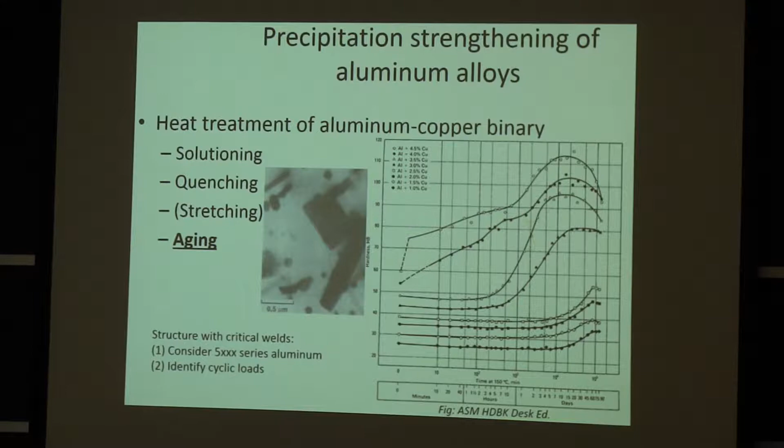Aluminum alloys, if you remember from yesterday, their strength increases when you heat them up, when you age them after the quenching. So if we go through the time-temperature treatment, you expose them to high temperature, that's temperature and time, and that is to put the elements in solution. At that point, say it's an FCC structure for aluminum, all the copper, all the magnesium, everything is in solution. There's only a single phase, no precipitates.

Then very rapidly you quench it. And that's where Professor Eagar mentioned about forming residual stresses, because if you have a thick plate and you cool the outside, yes it will shrink, but the core will prevent the whole thickness. If this is thick, the core of it remains hot, and therefore you can have a little bit of stretching of the skin, essentially.

It's the same way that you do tempered glass. You cool it down rapidly, and you deform plastically. You exceed the yield strength on the surface on each side, and when everything cools down, you're left with compression, tension, compression. It could be good or it could be bad, it depends on your application. So in the end product, once you're quenched, you have these residual stresses.

Now, you could use the alloy as is in this quench condition, but it's normally very soft because when you quench, you didn't have the time to form the precipitates. What do the precipitates do? They increase your yield strength. They are obstacles to dislocations in aluminum.

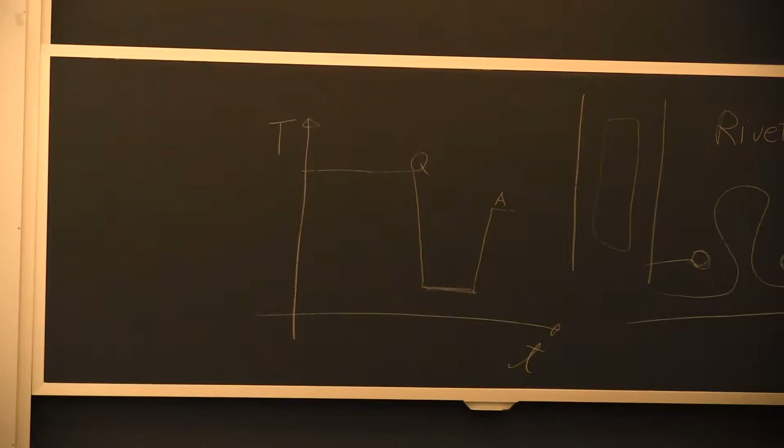The relevance of it with respect to this class this semester, as Professor Eagar mentioned about welding. In welding, you'll heat up the material in the heat affected zone, and that's essentially what will change this whole treatment. Professor Eagar mentioned 6061 as being a very typical fabrication alloy. It's being welded a lot of time in T6, which is the high strength temper. It's close to the peak hardness.

If you have this material and you weld it, you fuse in some area, and there's another region next to the fusion, the heat affected zone, that gets heated up and cools down really fast. So you will lose your precipitate in that zone. I'm showing this right here to illustrate what Professor Eagar mentioned about a factor of 2 reduction in strength. So that is here, this pinkish curve.

But for yield strength, it's even more. So depending on what you're designing for, and if you're looking at fatigue, that's the reason why in terms of aluminum alloys, you have to take an additional factor of safety if you're going to weld aluminum. It's not becoming brittle, it's just becoming really, really soft in the heat affected zone. And therefore, if you have cyclic deformation, fatigue, you'll have a chance to form cracks at a lower load.

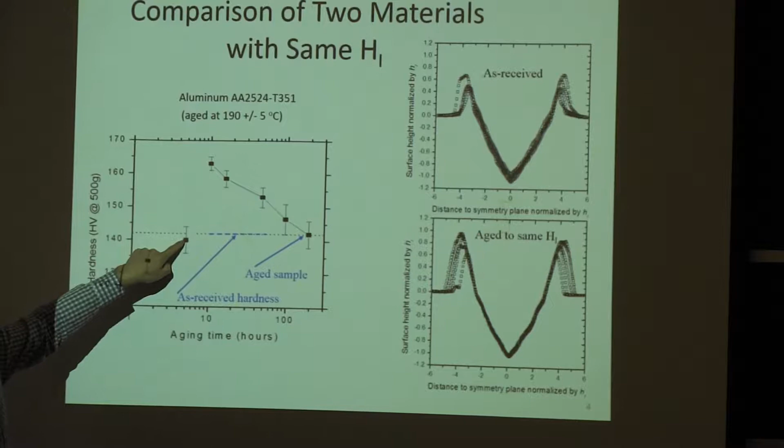The other aspect I was bringing up, this data here, is just to show that same thing in terms of hardness over time. It's going up, then it's going back down. It's an experiment I did back when I was a graduate student where I compared the underage configuration, so smaller precipitate, to the larger precipitate here.

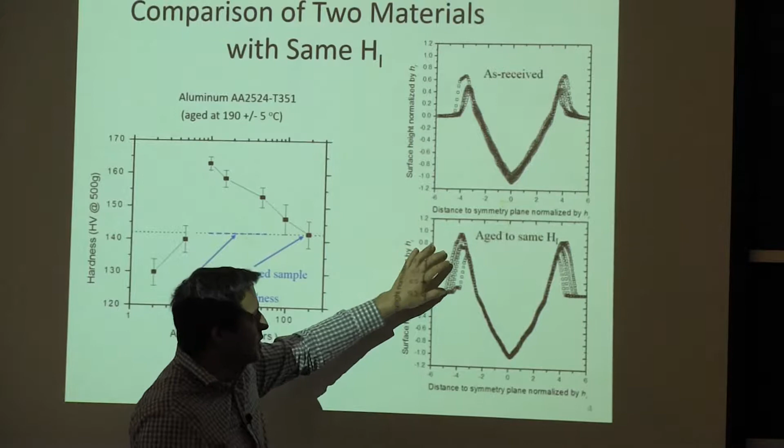In a scratch experiment, you're looking at a conical indenter that's going in this direction out of the plane of the sheet. Same loading condition, but you can see that you're forming more pileup, more material is building up on each side of the scratch in this configuration when it was overaged. So again, this is bigger precipitate. The material doesn't consolidate as much because the dislocations start going right through the precipitates as opposed to forming these loops.

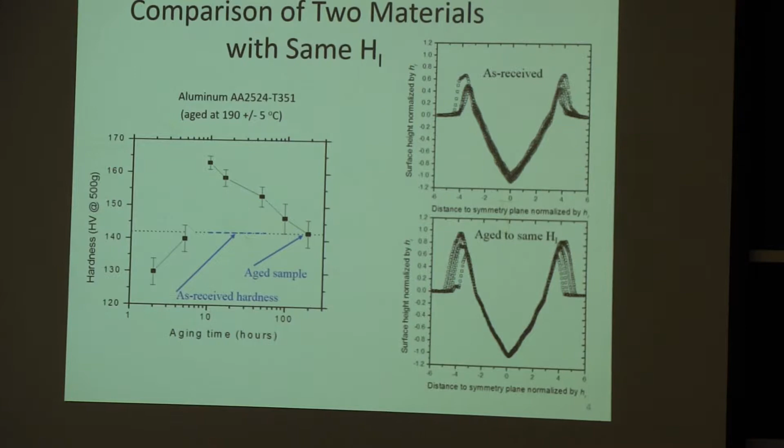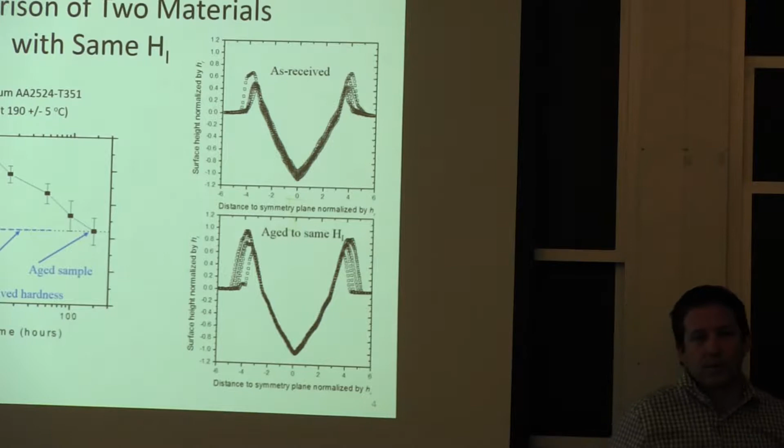And essentially multiplying the dislocation. So if you have multiplication of dislocation, everything hardens, you distribute more of the strain, and the material doesn't extrude as much to the surface. Part of this experiment was really to show you can gain more information if you're doing a scratch test as opposed to a hardness test, because when I went to the lab and ran the hardness test, I got the same number, but when I ran this test, I saw a bigger difference between them.

So it's a test that's very sensitive to hardening of the material, which relates to whether the precipitates are slightly smaller than the maximum hardness or slightly bigger. We will still use overaged aluminum alloy, especially in the 7000 series, not because of the mechanical performance, but because they have better corrosion resistance. So that always comes into the whole decision-making process, where yeah, you want great properties, but also you need to resist pitting if you have chlorides in the environment. And that's what bigger precipitate allows you to do better than if you have a very, very fine distribution of precipitates in the alloy.

So that's what I wanted to do for aluminum. Any questions? Because we're really sort of moving out of the aluminum section now.

That could be very general. Professor Eagar is here too.

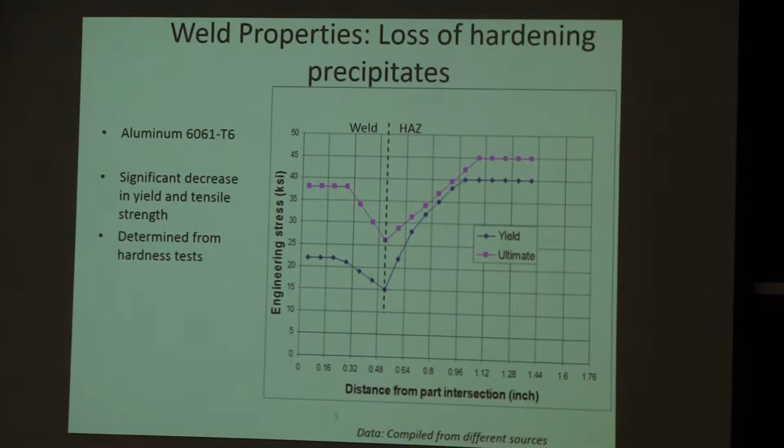Aluminum alloys are very useful, and they're generally good for corrosion resistance. Although if you fall outside pH of 3 to 9, you lose the natural protective oxide. So if it's in concrete, for example, you can expect more issues. If it's in a very acidic environment, in industrial applications, you just cannot use it. But for atmospheric conditions, like building applications or cars, it's normally a great material to use, pending that you are willing to deal with the reduction in strength during welding.

So last time in my third lecture on the use of materials, I talked about quality control, and one aspect that came in was workmanship. When we had the solder joint, I passed it around and essentially said whether you get good coverage, a good penetration of the solder in the socket really depends on if you're going to do a good sanding job and apply the flux and heat it properly. It's experience, but it's also true that every single time there's some variation in how you manage to do this soldering process. And it's the same in welding.

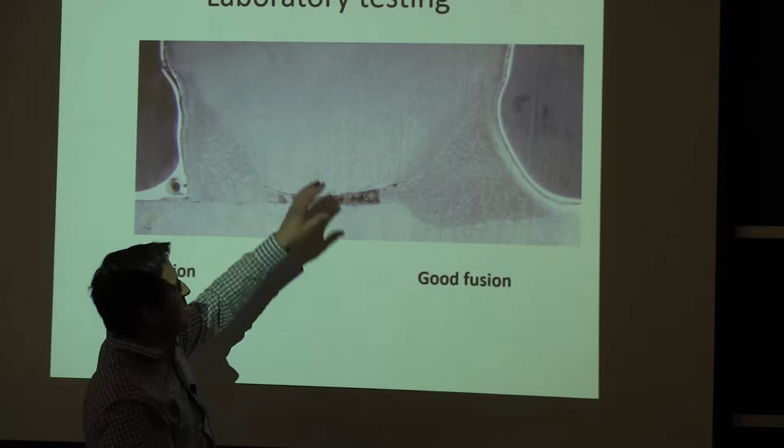If you remember, we talked about these roof joists. The roof joists were a tin piece. Here this was a tube, a thin wall tube for the chord, and we had these bars as diagonals that were a lot thicker. What I was pointing out is it's not a weld that's easy to do, because you have to enter a corner, as opposed to being at a right angle just doing a fillet weld. We call it a flare bevel - that's the name of the detail. This was an example that didn't work so well, because they put all the heat to melt the bar, which is the hardest component to melt, but there's really no significant fusion on the tube.

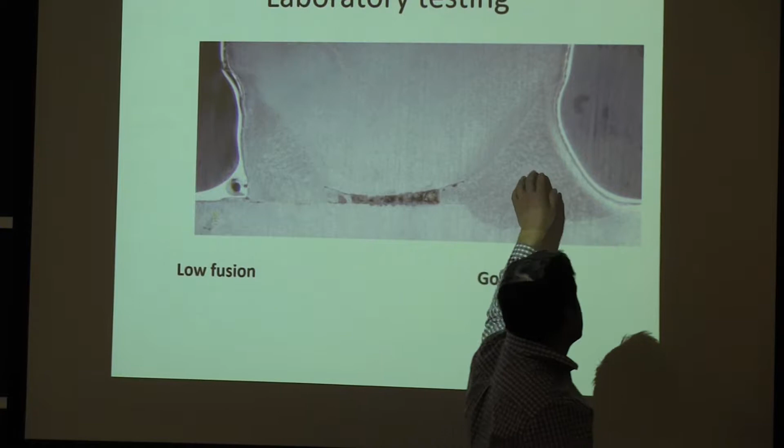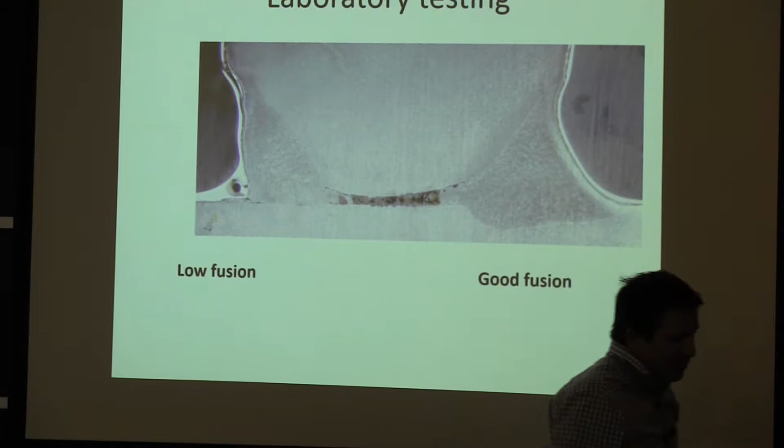And that was an example that was better done. I mentioned about the surface tension equilibrium here. So when it looks really smooth, it's because you had enough heat, you had the fusion. When it looks really sharp here, it means there was more molten metal sitting on the solid steel tube.

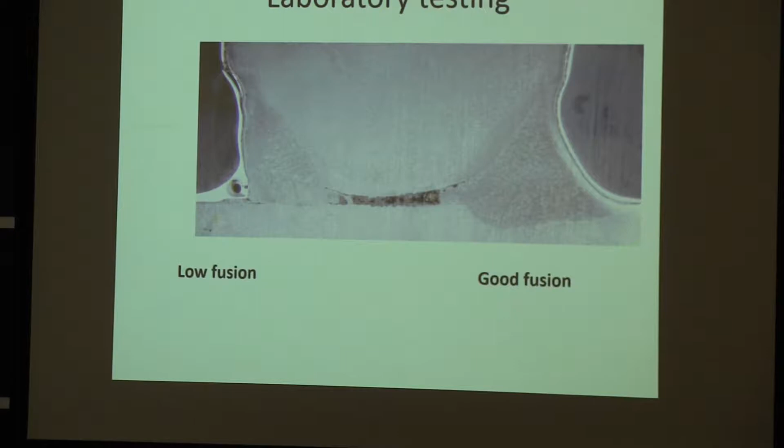So that was more or less the story there, where I said you can have a difference between the quality control during manufacturing, but also a receiving inspection that owners can do, and that we did in that case with the replacement joist.

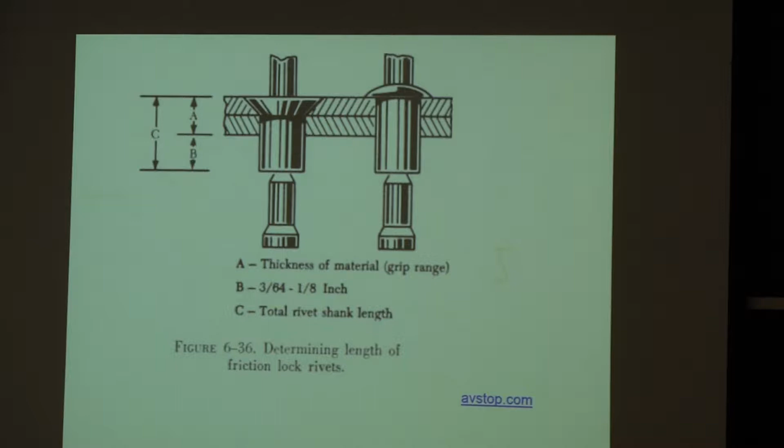We did talk about rivets, and that was tying with what Professor Eagar later mentioned here with aluminum alloy - getting the material really, really soft because of the quenching of essentially a solid solution, something that doesn't have any precipitate. And then as you go through the deformation process of making the head, you start forming these optimized microstructures that give you a good combination of yield strength and strain hardening.

So it's a little bit of a change for today with respect to factors of safety. I'm taking a little bit more of a general approach. You can design using very prescriptive guidelines, and then if you're doing a prototype, or making a new product or a new assembly, you're more or less on your own. You have to decide what your design is looking closest to, so you can have some framework. It's a big framework to be able to specify the material, the quality control, and predicting how it's going to be used when you're talking about load.

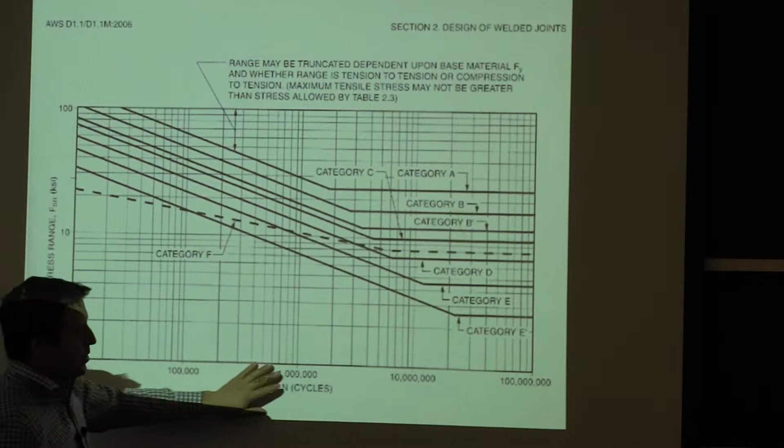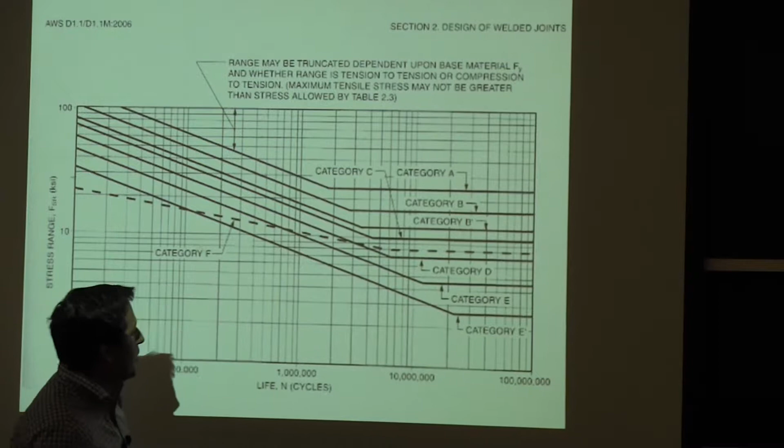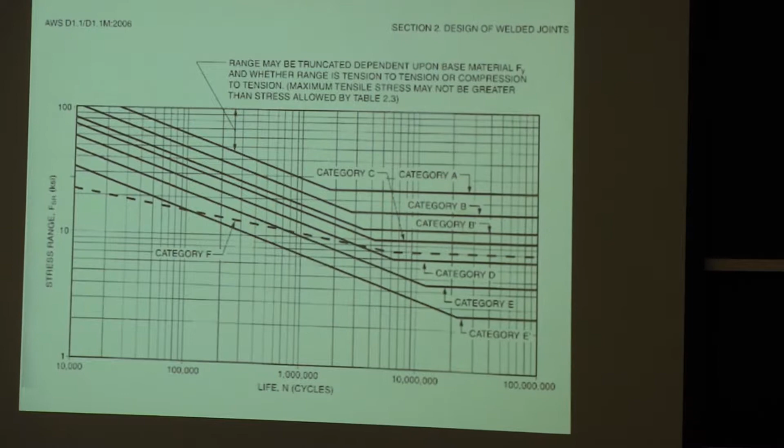So if we're looking at something under vibration condition, or we don't know how many cycles we get, we'd be looking here at the base material being above 20 KSI. Then the alloy, if it's a joint loaded in a transverse direction - say I have this detail where this is my bar, I have a cut in it, and then I weld this way, and I'm loading in this direction, with an attachment in the other direction. It's not a groove weld, it's a fillet weld.

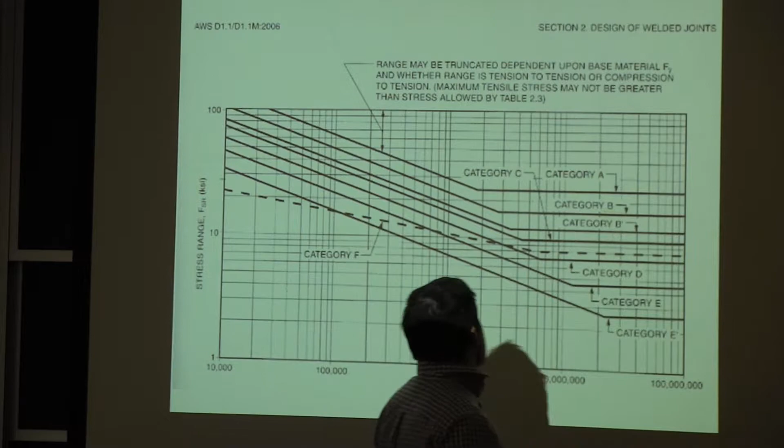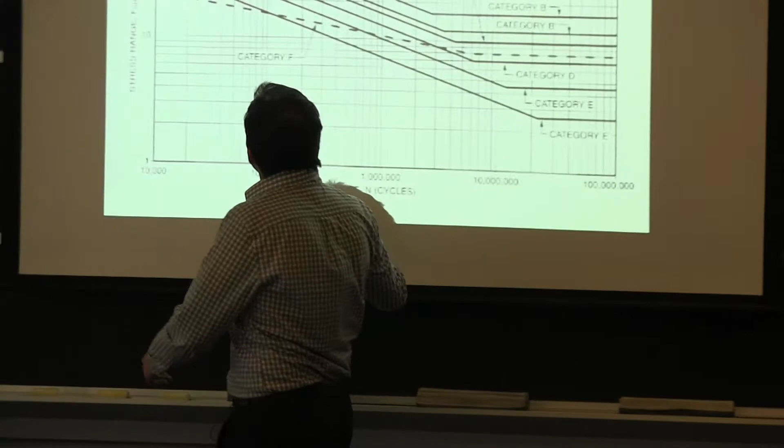This knockdown factor of 5, as you can see, if I only assume a factor of 10 here - 10,000 cycles - is much less. At 10,000 cycles, it will still be allowed, according to this framework of AWS, to have a stress range of 20 KSI. It's really when you take it to a longer life.

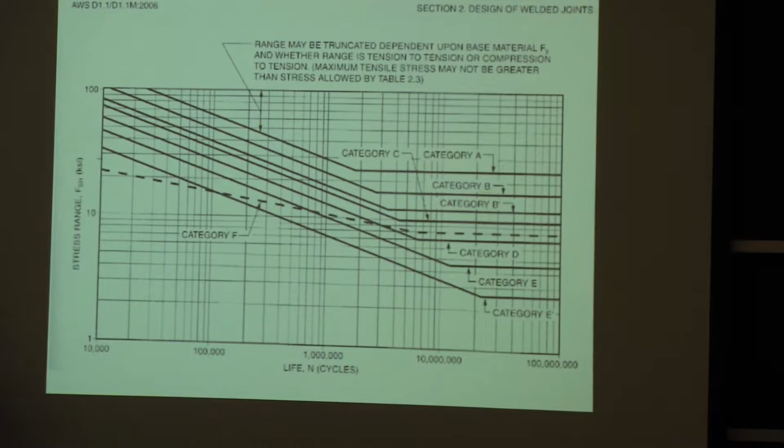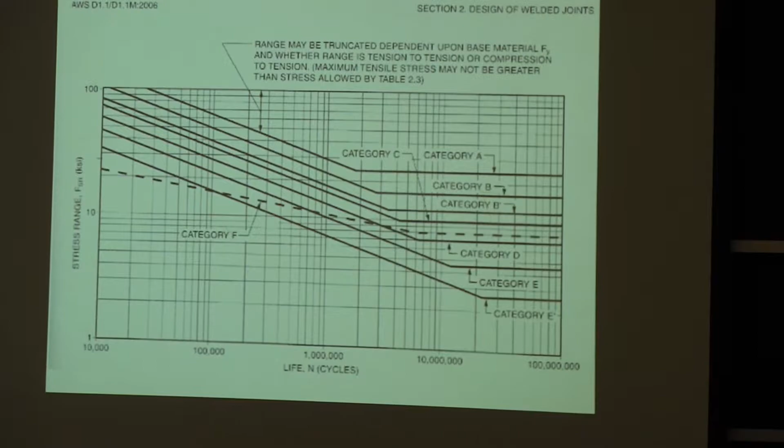So when I mention making decisions, if you're looking at a roof structure, how many times you're going to have a lot of snow, and how many times you're going to have wind effects - the uplift from wind each way - is what allows you to decide how you're going to build the requirements. What sort of safety factor is it? 5, 3, 2, with respect to yield strength. But if it's welded, we're not talking about 20%. We're talking about factors of 2, 3, 4. It's something to keep in mind.

So the factor of safety is, by definition, the failure load over the allowable load. But there are other definitions. One of them, with the n value here, is the yield strength over the working stress. It really depends how precisely you evaluate your allowable load and your failure load as to whether you're going to have a bigger or smaller factor of safety.

If it's a very large structure - the levee in New Orleans, when they had Katrina, had several failures for the reason that it was only built with a 30% margin of safety. And 30% when you don't have the ability to get all the soil data, for example - soil data in wet conditions were very important in that condition. Then do you have plus 30%, or are you missing 30% of capacity on your sheet piling or whatever the structure is that you're trying to set up, so you don't have any movement?

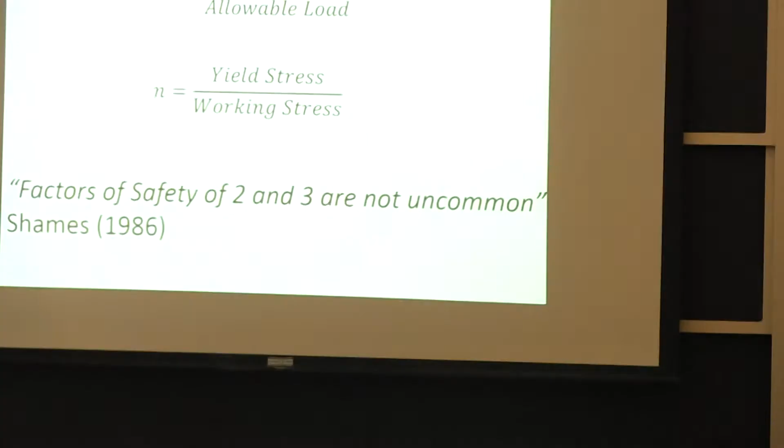Pressure vessels, when you apply this criteria of yield strength over working stress, which is more what they do in the ASME boiler and pressure vessel code, well, you're not taking into account water hammers, for example.

There are a lot of things, and you're not taking into account fatigue. You're just assuming that if you have a material that's 4 times stronger than what will make it yield, you're going to be okay. Which means you can't weld it any way you want if you're going to have a lot of water hammer or pressure fluctuation. Otherwise, you're going to have a failure.

Understanding the basis behind these factors of safety is something that, honestly, I've seen a lot of practicing engineers that have been there for a while. They see a factor of safety of 2, they think they're good. They really think that someone can go out and take 30% of it and get away with it. But we don't know. It could very well be that it's only 5, 10, 20% stronger than it needs to be, because it's just about the way it's calculated.

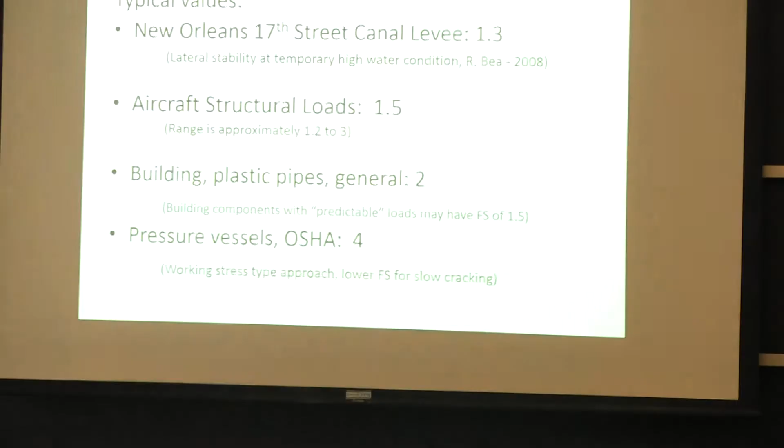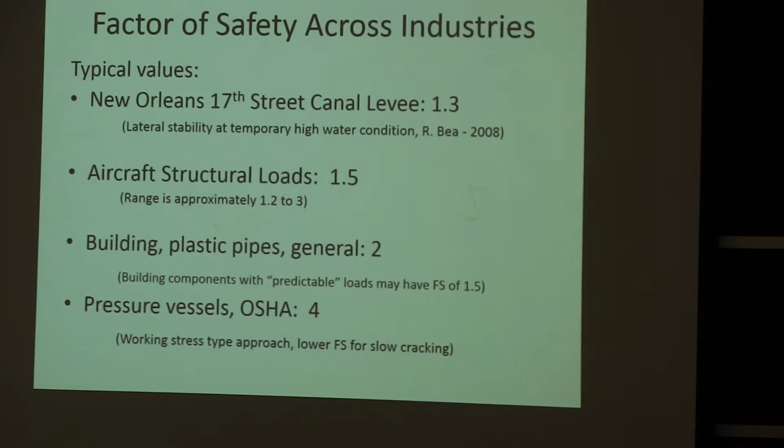So we went to the building, the roof joist example here with a factor of safety of 2. It's more of a design based on the overall joist. So they will size so the compression chord doesn't buckle, they will size so the diagonals don't buckle. And then when it comes to the joints, there is a lot of workmanship involved to determine how good the joints are going to be.

Whether you have a factor of safety of 2 on the joints, the reality is a lot of times you don't. Whether you get one diagonal that breaks, and either the roof sags or something's happening, and somebody has to go back, show it, and realize, oh no, we don't have exactly what we were looking for. But it's just the way the history has been, that people in that industry have been thinking and controlling a lot more the geometrical aspect of the joist as opposed to how the members are actually put together. It's a little unfortunate, but that's the way it is.

Now, going a little higher here in terms of quality control, in terms of with aircrafts, in terms of wind load, how much deflection of the wing you get, this is very precise data. When they have a model, they have a working prototype, they go and figure out how much the wing is deflecting during use, and they can go back and evaluate exactly what the stress level is. And therefore, in that industry, when they say, this is my stress, this is my capacity, they use a lower factor of safety, because they know better what they are dealing with in both sides of the equation.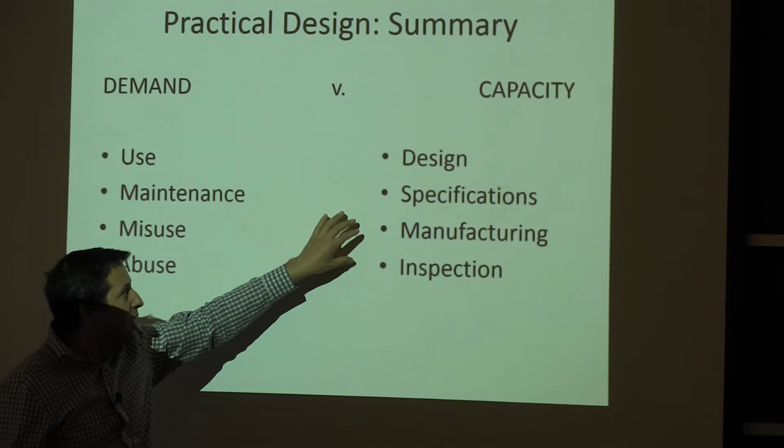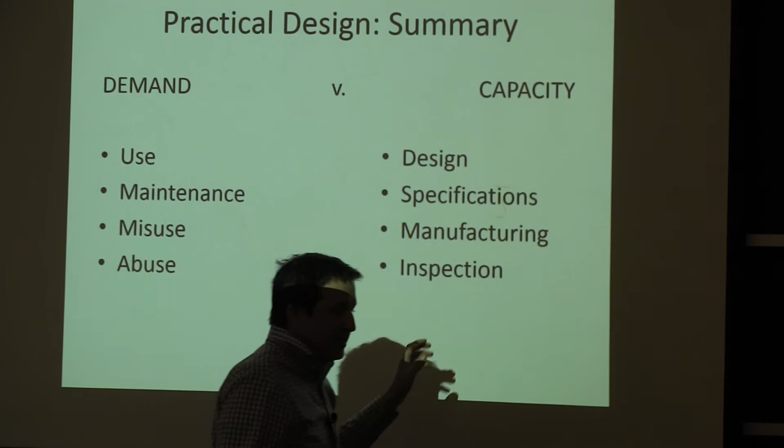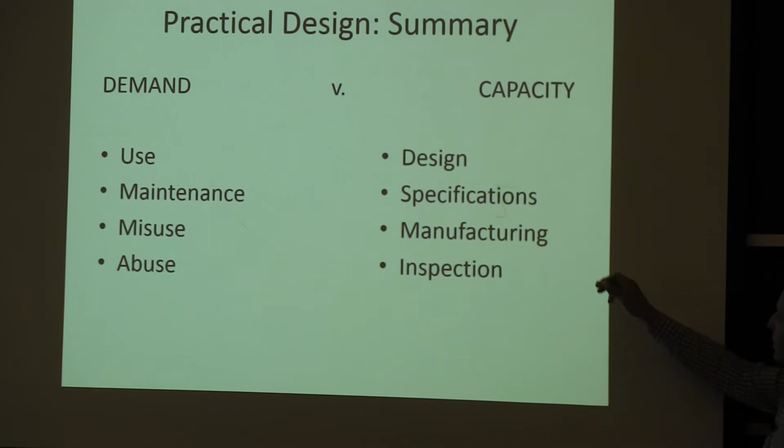In terms of capacity, the specification and inspection, especially thinking about welding and soldering, is going to affect what you're going to get. If you don't have any quality control, you can't be sure a joint will have any significant structural strength. If someone does the weld exactly like they want, maybe skipping the shielding gas or other necessary steps, your capacity is not reliable. You may still have it, but you're relying on the person's goodwill. That's why in the second lecture we focused on specification: are you going to weld by AWS, or like you've been told on the previous project? That's why it's industry specific.

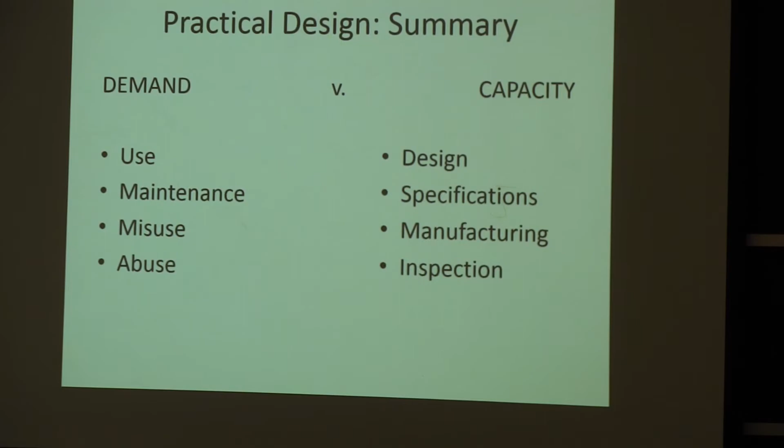On the roof joist example, the guy who qualified so well on the repair procedure was a boiler and pressure vessel welder, so for him this was nothing, the easiest joint. He didn't have to do the preheat and post-weld heat treatment you have to do with very high strength steel, so for him it was easy. The next guy, who had just gotten certified doing fillet weld and regular groove weld, found it the most complicated joint he's ever made.

Just realizing that, if they were able to do the joint we wanted, it was okay for our application, but there will be applications where you have to have better evaluation of the welder certification. So I think it's clear that there are very, very few structures that have a real over-design factor of 4. It's just the way we calculate it, the way we evaluate demand and capacity.

So why are we doing things the way we do it? There's a lot of history, but also lessons learned. In building bridges, they've been doing it a certain way for so long that starting from scratch tomorrow, saying we just put everything into the computer and it will allow us to reduce the factor of safety, well, maybe for the load, maybe you'll know the load better. But it depends what you put into the computer.

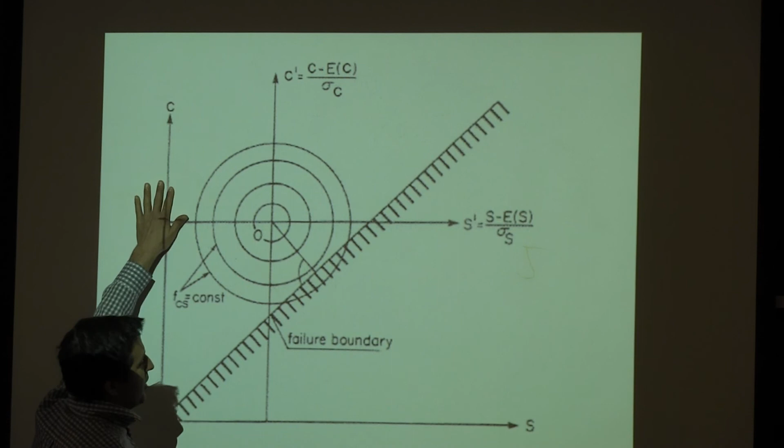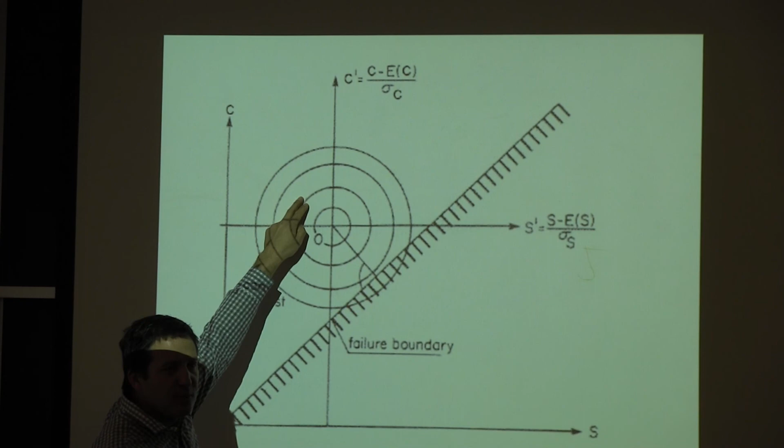This was a section I created about a completely different way to look at factor of safety, essentially a statistical way. This is the reference. The idea is, looking at demand and capacity, there's some variation in both. When we're talking about working stress, for example, that would be this point: higher capacity, higher stress, this is the failure boundary, so you put your margin. In this case, it looks like we have about a 1.5 factor of safety. But is it really 1.5? It depends on a lot of variables, maybe a little more, maybe a little less, and that's why you create these envelopes.

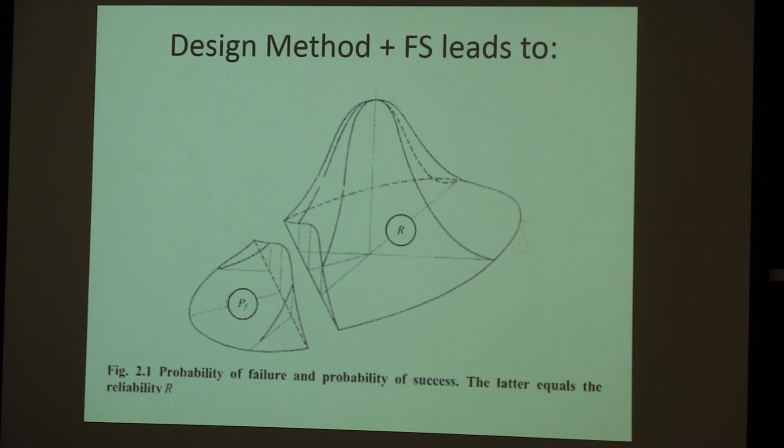And if you look at it in 3D, on the same axes of resistance and load applied, there's some variation around, for example, a typical value for yield strength. It can be less, but it's most likely going to be higher. That's the idea behind this concept.